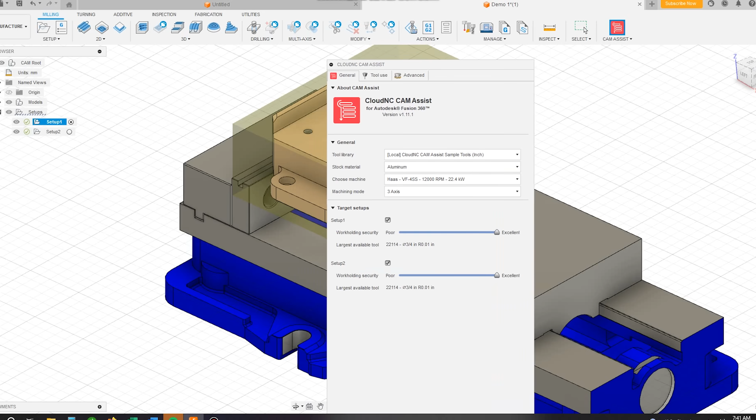So, like I said, 80% of the way there with one click. We're going to do just that. We're going to click our magic CloudNC CAM Assist button, and it's going to open this menu. This menu is basically going to set up how we want CloudNC's CAM Assist to program this part.

So first we have our tool library. Whether you're working in inch or metric, you can choose. Also, you can customize your own library. So essentially the library is where CloudNC's CAM Assist is going to pull your tooling from—whether you have custom tooling you want to set up, or don't use certain kinds of end mills, like we don't use bull nose here, we only use ball, so I can take them out. Maybe I have 3-flute tooling in certain diameters that's not in here—I can add them in. But it's a very good starting spot.

Now, although I'm in Canada, we use inch and imperial for everything, so I'm going to choose inch. Our stock material—aluminum, brass, whatever we want it to be. Today we're going to do aluminum just for sake of expediency. And we can choose our machine.

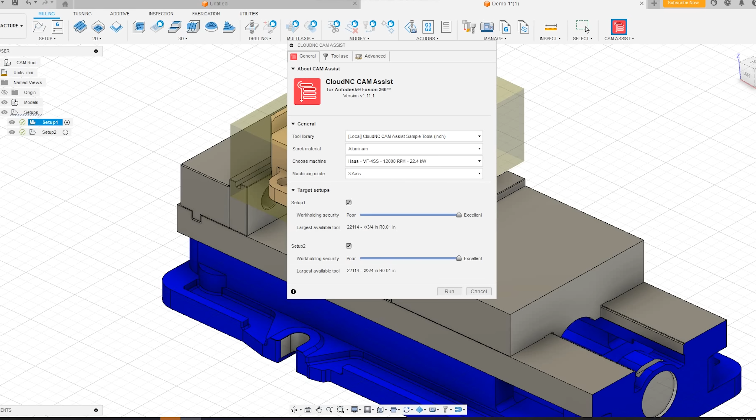So I already have this set up for my Haas VF4SS. But when I go in here, you can see they have pretty much every kind of machine under the sun in here. And let's say it's not set up in here—my machine is some weird one that maybe was a short run or a custom machine—I can go and choose some generic options to kind of give it some specs. But we're going to leave it on my VF4SS right now.

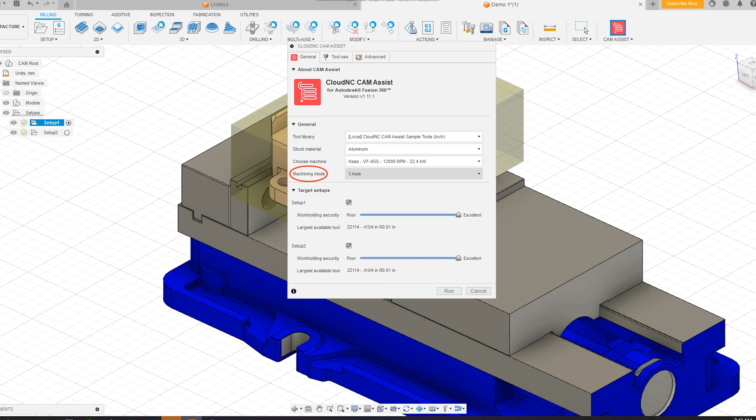Machining mode—so like I mentioned at the top of the video, they've actually released a 3+2 for 5-axis work. I'm not going to use it today because I don't have 3+2 on my machines. We're just going to do 3-axis, but it's a new feature, I highly recommend checking it out. I got to play around with it a little bit, and believe me, it works better than you'd think. But we're going to stick with this one in 3-axis.

Now, the one thing I often criticize a lot of demo stuff for—you know, when you're at a trade show and you see some part running perfectly, you think, yeah, of course, this is a perfect work holding situation, this is a perfect machining situation. It looks nice, but what's the reality of that? Well, CloudNC thought of that too, so right here in the target setups, they have work holding security.

So what that's going to do is, let's say this is excellent—I've pretty much welded this workpiece to the table. This is going to use higher feeds, higher speeds, bigger tooling because the workpiece setup can take it. But let's say that maybe I'm not in a position where I can hold it as well.

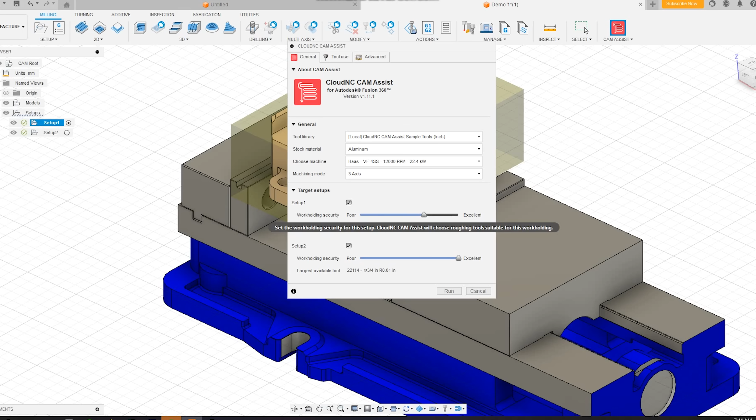Maybe I'm holding on to only a little bit of the part, maybe it's a thin-walled piece of extrusion that I'm starting with. I can go and slide this down, and what that's going to do, you can see right below here, is drop the diameter of the tooling as one aspect, so it's going to have less force on the workpiece as it goes. But let's say, for sake of illustration, we've pretty much welded this thing to the table.

It's going to use bigger tools, heavier cuts. So now I go through to my tool use. This pulls up your tool library.

So what I can do here is say, we actually don't like the 1/8 bullnose we have in-house, I can take this off the list. Maybe I'm waiting on an order of more 0.17 drills, I can take them off the list. Or maybe I really wanted to use this tool, so I can gray out everything but that tool and prioritize it.

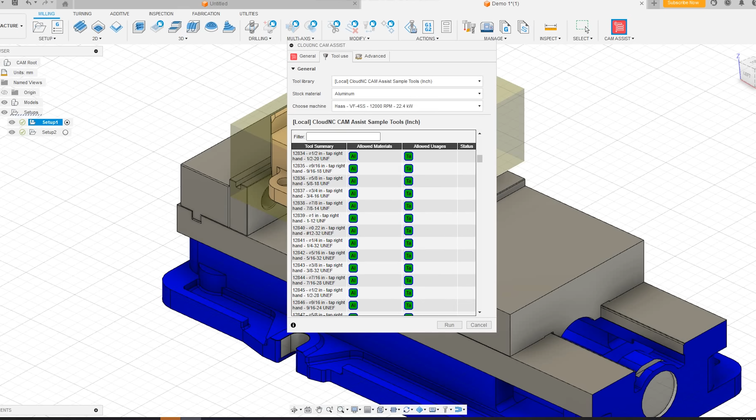Easy peasy. So now I have advanced — and it's funny because it says advanced, these are advanced options, but the interface for this is so simple.

It's very handy. So I can say, do I want it to do face milling? Maybe I don't want it to do face milling, I'm already starting with ground stock perhaps, so I can take that off.

Bulk roughing — these are our typical roughing toolpaths. Do I want detailed roughing, do I want it to go in there and take a lot of little cuts out? I can do that too. Deburring, hole making, I can choose all these things here.

And then also I can say, do I want to use a chamfer mill to deburr this, or do I want to use a ball mill? We're going to use a chamfer mill.

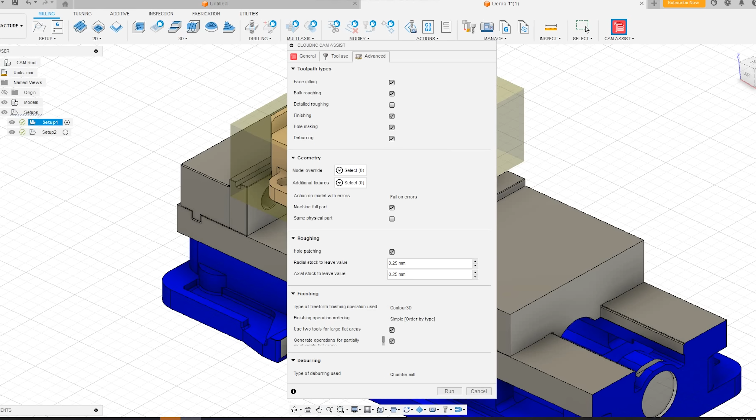So I'm going to hit run. Now this is when it's sending this file with all my options out to the cloud, and you're going to be surprised how quick this is. Is it instant? No, but it might as well be. It gives you enough time to pretty much go get a cup of coffee and come back.

So it's going to compute all my finishing strategies, all my approaches, and give them back to me as toolpaths. Now here's the thing, guys — this isn't giving you recommendations, it's going to do it for you.

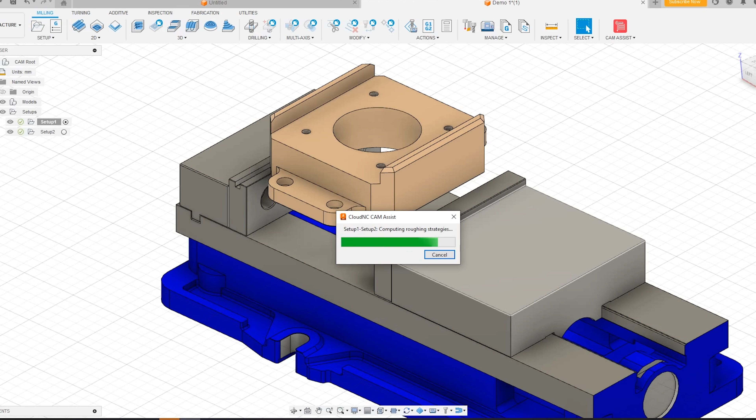Now, you've got to check it, we want to look at it. I don't want to take this, pull it straight out of my computer, put it in a machine, press go, and walk away. That'd be crazy. No matter what, you've got to check your CAM programs. But like it kind of says on the tin, it's going to get you 80% of the way there. There's no value in a programmer going through and having to select 30 holes to drill — it's much easier if they can just put this on there and away it goes.

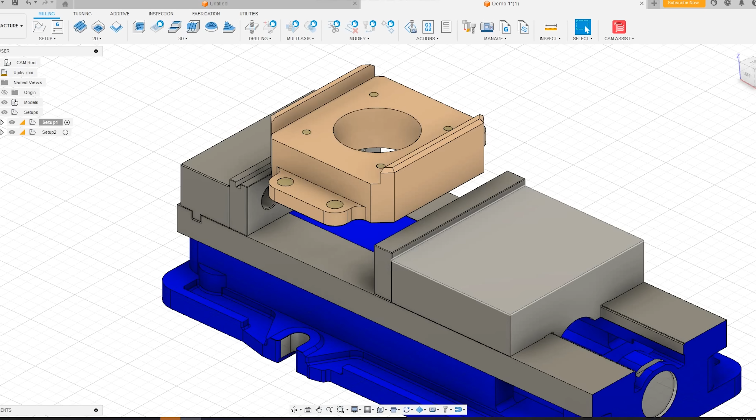So here we are, we now have our setups. For CAM Assist, we click on this here, and you can see it's going to export all my toolpaths into this. So we have our facing toolpath — you can see that's a pretty standard facing toolpath, basically just taking the top of the stock off.

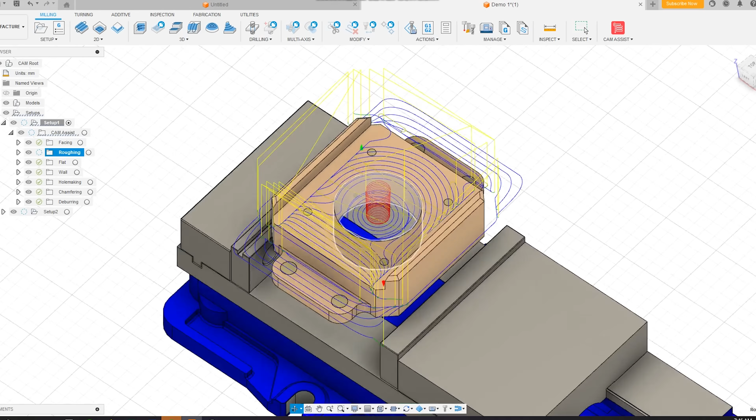We have our roughing — this is going to go through and rough out that part. You can see this is basically the way I would program it, it's very similar. If I go to flat, this is going to finish all my flats to make sure those are coming out in spec.

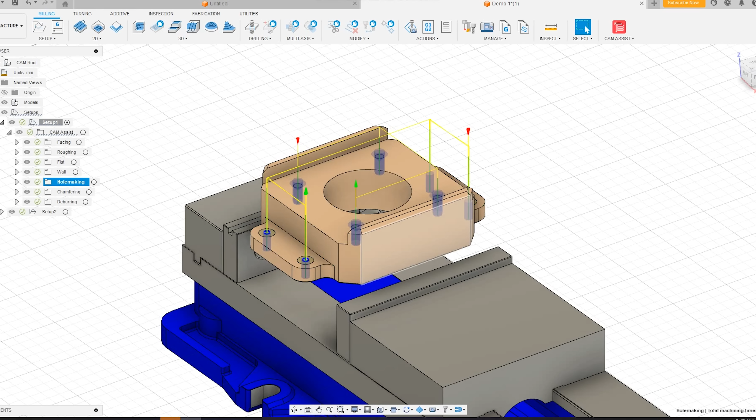I go to wall — again, you can see everywhere there's a flat wall, that's going through and finishing that part for me. Hole making, again, it's going to drill my holes for me. I believe if there's threads in the model, it will actually pick that up and thread them as well, but I'd have to double check that.

Chamfering — you can see it's going to go and chamfer these areas here, it's identified that that is a chamfer, so it chamfers it for you. And then I also have my deburring, so it's going to go through and see everywhere that it can deburr or needs a deburr, and deburr it.

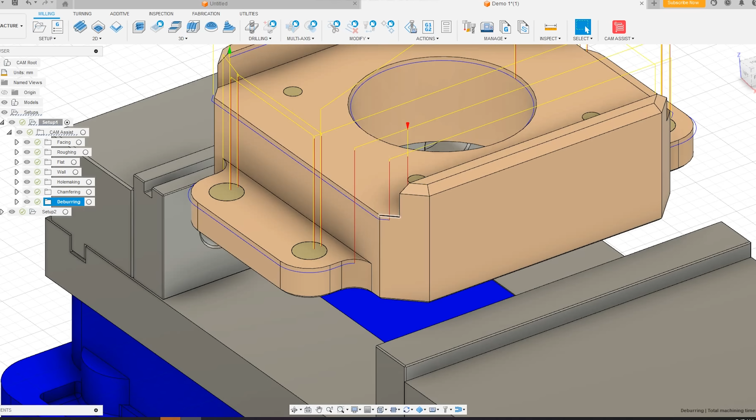And you can see it's not going to run that tool right into the wall anywhere, even with those angles where it needs to stop a little short. It's just fine. Now if I go over to my second setup, you can see I need to turn this off and turn this one on.

You can see that this is going to finish it off on the other side, but we'll save that for another day. Now the really important thing about this, guys, is that when we're talking about helping people do more with less or taking jobs or whatever it may be, there's no value in a programmer going through and selecting 100 holes to drill. That doesn't do anything for them. Or going and selecting every contour. That doesn't help them. What this does is take all the busy work and the basic admin tasks with programming out of there for you.

I still want to go through, check my speeds and feeds. Maybe I don't like a toolpath that it generates. Well, I can take that one out and I can add my own toolpath in. Maybe I don't like the way it's doing something. Maybe I want to size this in before I size this in because I know how that part is. You can go and reorder this, or you can keep what you like and add in what you don't. It's very, very simple that way.

Okay, guys, so I think we can all agree that this all sounds really good in theory. So what we're going to do is we're actually going to run that program more or less straight out of the machine. What I did is I scaled that model to about 50% just because I didn't have a piece of aluminum big enough on the shelf. I reprogrammed it, same thing with that one-touch system. And the only thing I did is I changed one feed. I dropped it a little bit because I was a little nervous. And that's all I did.

So there you have it, guys. Very, very interesting stuff. I'm definitely going to be playing around with it more. As mentioned, we did show it in Fusion, but it is, I believe, in beta for Mastercam at the moment.

One thing I keep seeing when I'm looking at the online reaction to this right now is that people are saying, oh, it's going to take jobs. Oh, it's going to eliminate everything for computers. When you look at it, guys, CAM software itself, people probably said the same thing about that. Oh, you don't need a skilled machinist to go and program G-code anymore? It's going to take jobs. Did it take jobs? No, it helped machinists be able to do more.

Instead of having to write out 30 lines of code by hand, they could click one button, you know, a contour, and have a toolpath. It's really the same thing. I'm sure people said it when CNC came out. Oh, we don't need 10 guys cranking handles on machines anymore. It's going to take jobs. It didn't really take jobs. It just helped deal with the fact that less people are in the trade.

And when it comes to this stuff, guys, it's already here. It's here, the same way CNC technology is here, the way CAM programming software is here. Now AI programming is here. You can turn your back on it and say, no, I don't like it, and that's fine. But I think it's very important to stay open to these developments when they come up, because you don't know which one's going to be the next level of a CNC machine or the next level of CAM software. And I think we can see there's something here. It's very, very interesting.